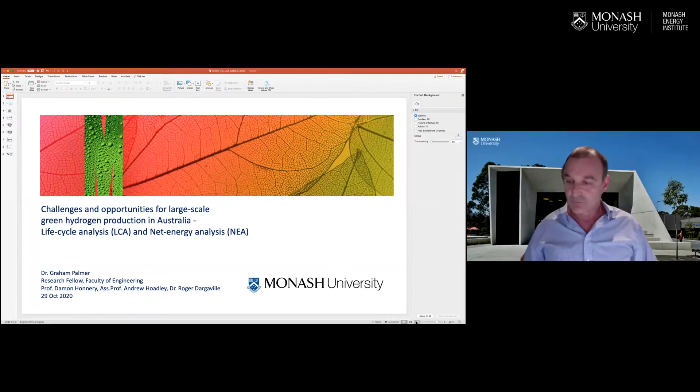Okay, so I'm looking at life cycle impacts and I'm trying to understand those. I'm working in a team with Andrew Hoadley and Roger. So we're looking at large scale hydrogen production.

So really the most important thing and really the starting point is that the primary drivers for deploying hydrogen at large scale are environmental rather than economic. So there's a lot of ways we can make hydrogen, but if they're not environmentally sustainable, then there's really no point in doing it. But at the same time, it needs to be economic, otherwise nobody's going to buy it.

Now, one of the key things to understand about renewable hydrogen is that the environmental impacts are embedded mostly in the plant rather than through operations. So from the day that the production starts, most of the environmental impacts have already started. So what we're looking at doing is how do we quantify those impacts? What are the uncertainties? And how can we use life cycle analysis and net energy analysis to support plant design and decision making?

So one of the ways I'd like to frame this is that there's really two domains for looking at green hydrogen. There's the economic domain, which is nominal, so we look at prices and markets and so forth. Then there's the physical domain, which I think of as the real, what is happening in the real world. So in economics, there's money flows, there's prices and profit, and ultimately this is normally where decisions are made.

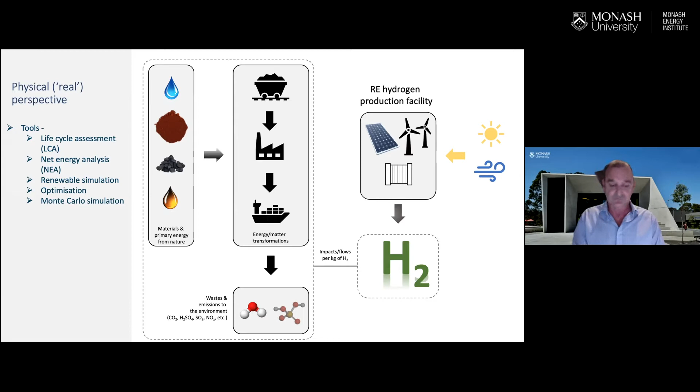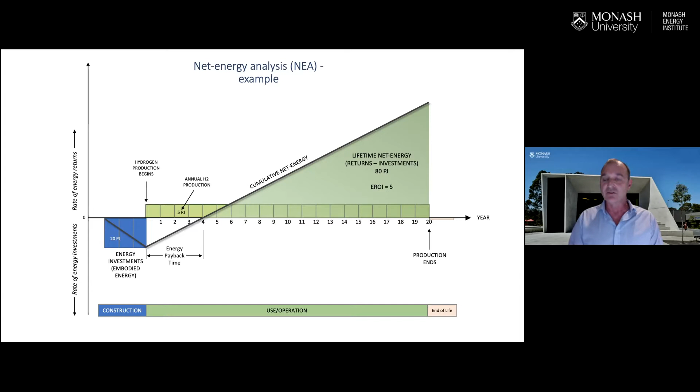So this is an example of net energy analysis where we look at the embodied energy of the plant and equipment and look at the cumulative energy returns over the lifetime of the project. So I've just given a simple example here where there's 20 petajoules of embodied energy invested in the plant and equipment, and if it's producing 5 petajoules of hydrogen per year, it takes roughly 4 years to pay back the original energy. Now, this is a key metric that can be used to assess just how sustainable an energy production system is. And this is one of the tools that we use.

Now, there's many impacts that we're looking at. The headline impact is, of course, global warming potential, which all fossil fuels contribute to, but there's other things such as acidification, respiratory inorganics, and so forth. And then there's a host of other impacts. So some of the ones that we're particularly interested in with renewable hydrogen are the embodied energy, demand for critical minerals, land use, embodied carbon, and just the sheer scale.

So this graph on the right is just here to demonstrate that a shift to low carbon electricity carries certain impacts that we need to be conscious of. So in this particular one, it's looking at selected metals under different scenarios.

So as you can see, if we look at, say, copper, nickel, and aluminium, there's far more demand for those under low carbon scenarios. And this is something we need to understand and incorporate into our analysis.

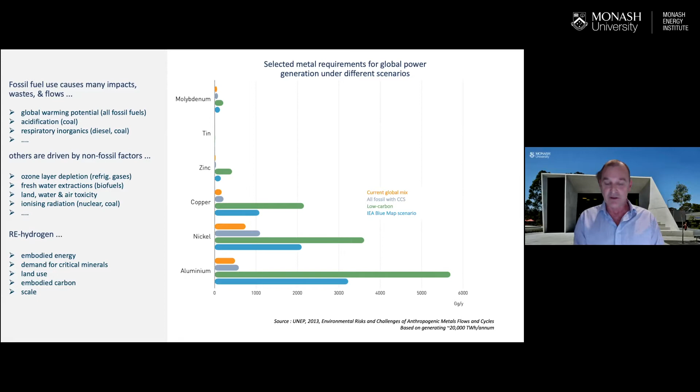So a project that I'm working on is we're looking at a decision support tool to be able to put all of this information together. So some of the things that we're looking at is technology selection, scale, economics, and so forth. And we'd like to integrate all of these so that we can better understand the impact of large-scale hydrogen.

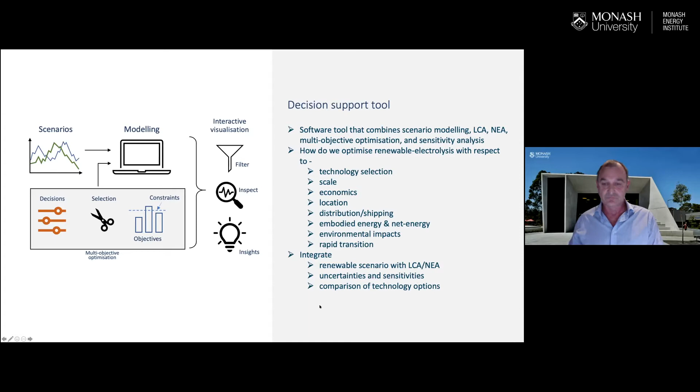Clearly, the notion of comparing the economics versus energy is really important, because both are really important vectors for understanding. And that net energy analysis is not only critical, but ultimately very difficult, considering the supply chain and all the components that are needed. So it'll be really interesting to discuss what you've actually found in that regard for different types of hydrogen production facilities.

So thank you very much, Graham. Our next speaker today is Dr. Stuart Walsh. Stuart is a senior lecturer in the Department of Civil Engineering here at Monash University. His work is focused on the development of tightly coupled geomechanical, hydrodynamic, and geochemical multi-scale models and their application in geoscientific and engineering problems. He's worked on a variety of practical problems around energy relating to the development of offshore oil and gas, geothermal energy production, carbon sequestration, and hydraulic fracturing operations. Today he'll talk about the mapping of available resources for green hydrogen production.

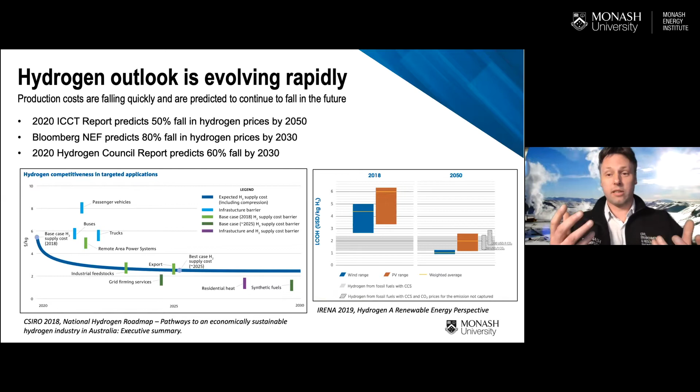Because there's a need not just for analyses of the potential cost of these sorts of systems, but also an understanding about what they might mean for where they're located in terms of the people at those locations, in terms of the industry at those locations, and also in terms of potentially the policymakers as well, what sort of new infrastructure they might want to put in place. So what we're interested in doing is designing tools that can highlight economic potential for hydrogen projects. And in collaboration with Geoscience Australia, we've been working on ways of assessing this economic potential. So how do we go about doing that?

Well, if we think about a typical hydrogen project, especially a green hydrogen project, there's a number of different things that we need to combine to make an assessment of what their impact may be. Number one is the mode of hydrogen production. Another one is the energy source that's attached to it, and also how big everything is. That's obviously very important. But at the same time, we need to place that project in space somewhere. It has to be located somewhere. And in particular, if we're talking about renewable energy systems, where you place that project is really important. Not all renewable resources are created equal in different places around the world. And the quality of that renewable resource is going to impact on the viability of your project, depending on where it's located.

At the same time, though, especially in a country like Australia, where we're very, very large, we've got wonderful renewable resources in lots of different places, we need to be concerned about what the available local infrastructure is. Your project is going to be affected by how close you are to ports, to roads, other transportation systems that you might want access to.

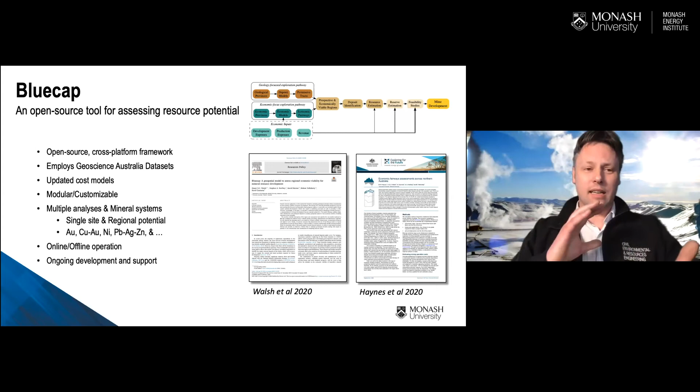But working with Geoscience Australia, one of the things we realised was that this tool that we've developed for assessing mineral economic potential could also be applied in the hydrogen space. And in particular, we've put on an extension of that code looking at what we call the economic fairways of hydrogen production. The idea here is that we take an assessment of the viability of different forms of hydrogen production, both the energy source, but also the form of the production itself. We come up with assessments of what the cash flow would look like for that scale of plant under different assumptions about the capacity factor.

And we build up a set of functions that we can use to determine the viability of those types of projects on different scales. But then what we do on top of that is we combine that with maps of the capacity factor around Australia and also the available infrastructure. And combining those things, we can come up with assessments of the economic potential and other impacts of these projects on a regional basis. So just to go into a couple of details about how these particular models work.

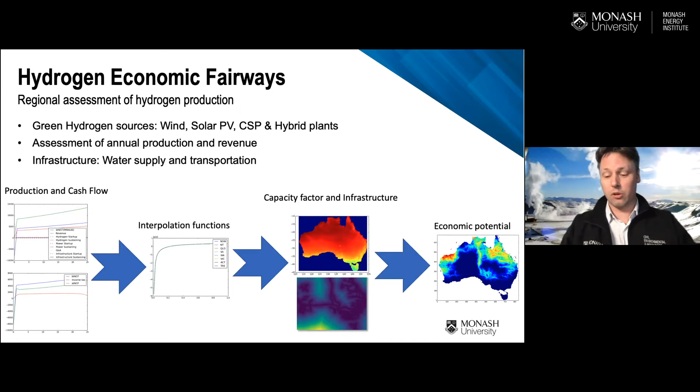Here is an example of the sorts of components of the calculation that we go through when we're thinking about assessing a particular site or a particular location. Basically, we combine different inputs about the size of the plant, the type of operation, that sort of thing. And then we can come up with economic assessments and also energy assessments about what the hydrogen plant will need. We can combine that with the power plant of a suitable size that's appropriate for the renewable resource at that location. Also combine the cost of the available infrastructure. And from there, assessments of cash flow and economic value are derived.

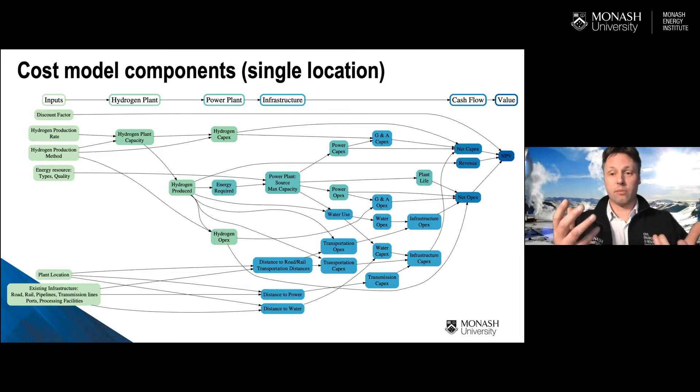Now, to be honest, this type of assessment is not all that different from what you would do typically if you're trying to work out what the cost of hydrogen is. What makes it a little bit different is that we're not just doing it at a single site, but we also do it on a regional basis. And in particular, one of the things we're really interested in is the interplay between the location of the resource, the scale of the hydrogen plant, and the available infrastructure that's at different locations. Because as I mentioned, Australia is a big place. Some places are better suited for hydrogen production than others, depending on how much infrastructure is available at those locations.

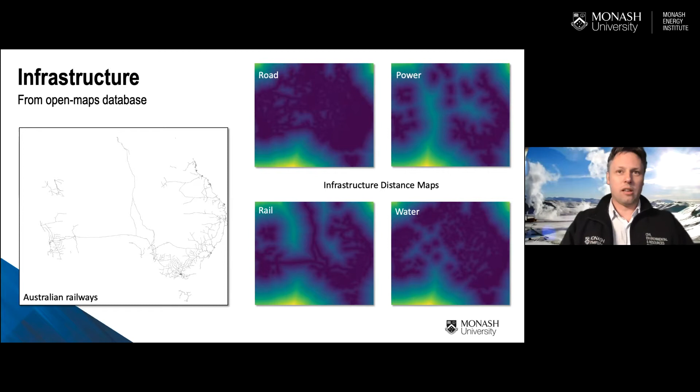So what does this look like when we put it in practice? Well, here's an example of just one of the sorts of calculations we might do. We're interested, for example, in assessing how you might go about siting a hydrogen plant that uses some sort of solar energy as its energy supply. So we start off with our solar capacity factor, but then we combine it with our assessments of distance to infrastructure, transportation distances to the closest port, all those sorts of things, to come up with an estimate of what the potential value is of a hydrogen plant at a particular location.

Once we do that, we can then rank it and come up with an assessment of which areas might be better suited than others for particular types and scales of hydrogen production. You can see that on the right-hand side. One thing that I want to point out about this particular map, though, is that you can see two things going on here. One is you can clearly see for solar-powered resources, we tend to have better solar power in the northern parts and also in Western Australia.

But in addition to that, you can also see that while there are particular areas towards the centre of Australia which have really good solar resources, they're not so well served in terms of the available infrastructure, distance to water and the like. And so that's one key thing that we want to get out of this particular code that we're putting together. It's the ability to be able to assess the different impacts of infrastructure on the viability of hydrogen projects.

Because as we see it, it's not just a tool for the industry, it's also a tool potentially for policymakers to sort of say, well, if we put in an additional road or rail in this particular location, what would that mean in terms of the industry, in terms of serving the communities better and the hydrogen productivity better as well. We can also start to ask and answer different sorts of questions around how you run your hydrogen project as well, which is kind of interesting too.

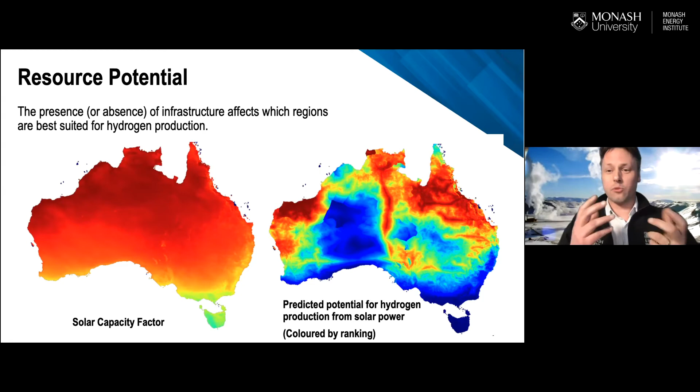So one of the examples we've been looking at is thinking about the impact of alternative water sources. In Australia, especially when we're thinking about hydrogen projects, we are often concerned about water supply. It's a relatively dry country, and as such, we want to make sure that we're making the best use of the water that we have available. Hydrogen projects are liable to take a significant amount of water if they run, and so it's worthwhile considering whether or not we can work off alternative water sources.

Two that have been identified are things like seawater or saline aquifers. We might also be thinking about running hydrogen off wastewater projects as well. What's interesting about this is when we can take our model and we can take, say, for example, locations of major populations as a proxy for wastewater treatment plants. Using that, we can actually make an assessment of what that type of water use would be in terms of the overall viability of different areas for hydrogen production.

So the nice thing about that is actually if we compare our rankings from before and after, in our model at least, we're seeing that the use of these wastewater sources is actually not making as much of an impact as you might think on the overall viability of different locations for hydrogen production. The reason for this comes back to what I was saying earlier about the need for locating plants close to good infrastructure. It turns out in a lot of the places where we have good infrastructure, the reason that we have good infrastructure out there is because we also have people. People produce water, or at least wastewater. And so we can take advantage of that too.

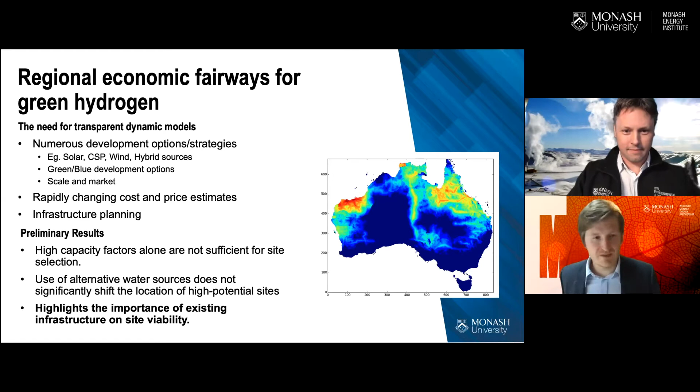The idea of actually combining all those elements and starting to get maps of where the resource and scale of operation actually makes sense for a given hydrogen production plant, I think is fascinating. And the linking back through to even the type of water and the cost of that water and the nature of that water, I think that's absolutely critical as we move forward. So thanks very much for your inputs there, Stuart.

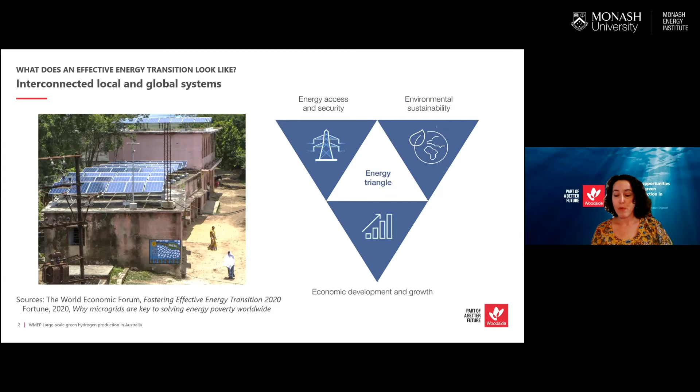I'm sure it's clear to those of us living in Australia that the opportunities related to large-scale green hydrogen look vastly different than they would in microgrid-empowered villages. But what I'm going to highlight is that in many ways, the challenges here can be more complicated. Australia operates within a very modernized energy landscape, which can add more layers of complexity to these enabling dimensions outlined by the World Economic Forum that are shown here.

Some examples of how that can manifest within these 6 dimensions are within energy systems structure. That's largely dependent on the location and resources outlined by the previous speaker, and Australia is very isolated and characterized by vast distances, which really presents a challenge here. There's capital and investment. With the current global crisis, less capital may be available, and there are also competing opportunities to invest that somewhere else. The increase in investor activism, green funds, and the proposed pandemic recovery acts may push forward this investment in green regardless of the crisis.

So there's really a lot of uncertainty, and this really highlights the need for regulation and political commitment. This is a critical component of success in terms of climate goals and investment, as well as developing hydrogen standards and safety regulations. Trade regulations and international relations play a huge role if Australia aims to be an energy exporter. So in the case of Woodside, not only do we need to make sure that we're abiding by any domestic regulations and standards, those also need to interface with whatever other countries we plan to export to, to make sure that we can accommodate their own standards and regulations as well.

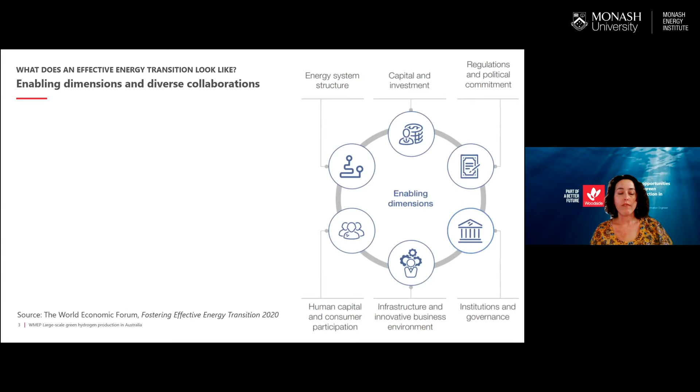So this is really bringing me to the main point, that the energy transition is not made up of linear shifts in the fuel mix or some simple substitution of production technologies that can be achieved by any single policy or innovation or investment. But rather, the social, economic, and technological systems that are connected to the energy system need to co-evolve and shape the transition really in unity. And this is extremely complex.

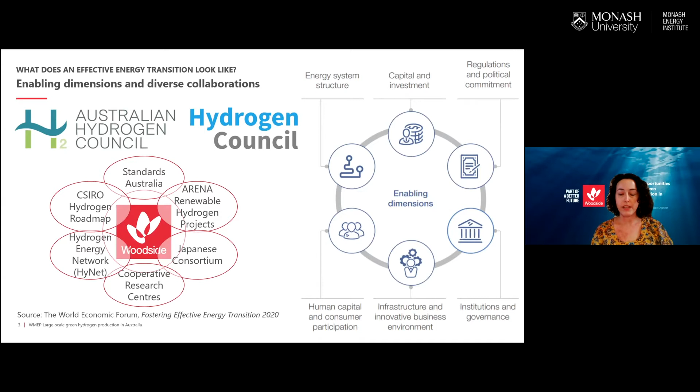So I'll highlight some of the collaborative groups that Woodside's involved with. They include the Australian Hydrogen Council as well as the Hydrogen Council and a variety of other groups working on standards, government policies, international consortium, as well as research centers to try to develop the enabling technologies that we'll need to support a large-scale hydrogen development of the future.

So now looking specifically at large-scale green hydrogen production, there are a lot of challenges all the way through the value chain. Starting with the renewable energy source, some challenges are that it might not be optimally located and it will always be intermittent, and that can be overcome through stabilization from stored electricity or adapting the downstream processing to cope with this variable flow of hydrogen. This isn't typical in most processing situations, so this does require a different operational format.

Using currently available commercial technology, the only viable approach to water splitting today is electrolysis. The main challenge there is that this process requires a large amount of energy to release the hydrogen. Most of today's electrolysis technology will require at least 50 kilowatt hours per kilogram of hydrogen.

So the electricity must be extremely low cost in order to reach the $2 to $3 targets that are set by national strategies today. New technologies are under development, though, to improve the water splitting performance and also lower these costs.

As for distribution and storage, hydrogen is a very low density gas, so it's very inefficient to transport unless it can first be compressed, liquefied, or attached to some sort of carrier molecule. These include liquid organic hydrogen carriers, ammonia, or even green methane. Each of these approaches has both pros and cons from technical, safety, and environmental perspectives. And it also really depends on the downstream needs of the customer because these aren't really interchangeable molecules.

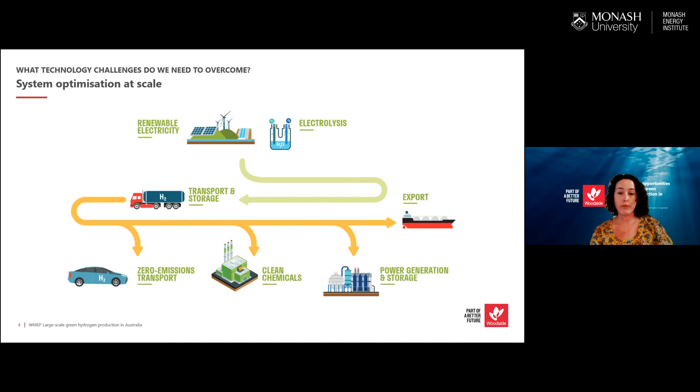Finally, we come to export, which is the extreme distribution challenge because the transport distance is very far. Not only that, but we need to comply with international maritime regulations, as well as work with shipbuilders to adapt their vessels to accommodate these new types of fuels. So that brings us to the more technical challenges, but I hope that helped to highlight that it's not really a technical problem. It's a very complicated cultural, societal, and world problem. It's a challenge that we face.

So in addition to the projects on life cycle analysis and the systems analysis of renewable power generation, those are projects that Woodside actively investigates with Monash and otherwise. Another interesting topic that relates specifically to hydrogen export is to develop innovative tank designs and improve materials for large-scale liquid hydrogen storage. Containment of liquid hydrogen requires materials that can withstand extreme cryogenic temperatures of just 20 Kelvin. The only liquid colder than hydrogen is helium.

Our work with Monash researchers must first develop models to better understand heat flows within a specific tank design. No matter how good the design is, there's always some kind of heat entering the vessel, and that's especially true during loading and unloading. This is going to produce boil-off gas. So another part of our modeling work integrates efficient methods to manage boil-off gas, which then will reduce or even eliminate hydrogen losses through the value chain.

We also aim to develop better performance and low-cost insulation materials. These materials will improve the large-scale tank performance, and they can also be applied to other areas throughout the value chain, such as loading lines and cold boxes. An example of modern insulation materials includes microbubbles and aerogels, which can be incorporated into vacuum and multi-layer insulation systems.

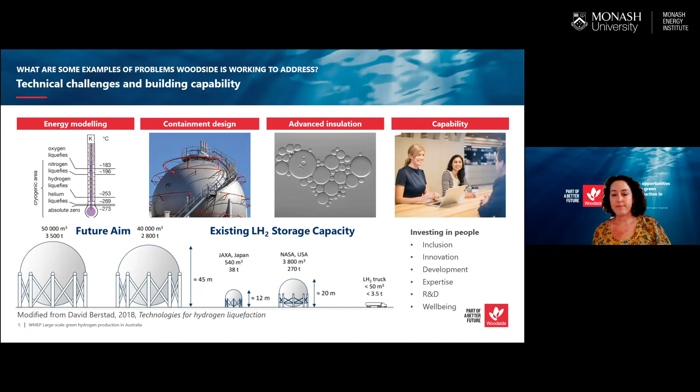So, thanks. Your messages around the complexity of the energy transition really hit home, particularly around the need that the energy transition is underpinned with many competing investments and options. And so there is that need for new dimensions to be opened up and enhanced collaboration. And in particular, there's also technological challenges that need to be addressed around ultra low cost electricity, electrolyzers, transport, and I guess then there's the uptake, the use cases.

So there's plenty of challenges across there. So that collaborative piece is really important. So thank you very much, Ashley. That's fantastic. So that winds up the presentation parts.